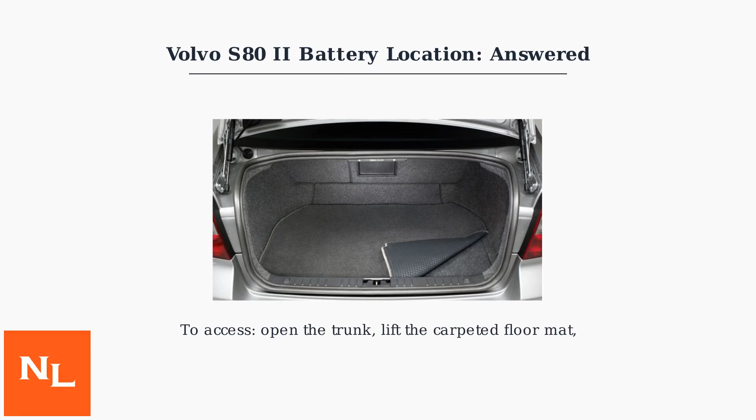The main 12-volt battery in the Volvo S80 II from 2006 to 2016 is located in the trunk, not under the hood. This design optimizes weight distribution. To access it, open the trunk, lift the carpeted floor mat, and remove any plastic covers. The battery sits on the right side in a plastic tray, secured by a clamp and cables. This is where you'll find the battery for jump starting or replacement.

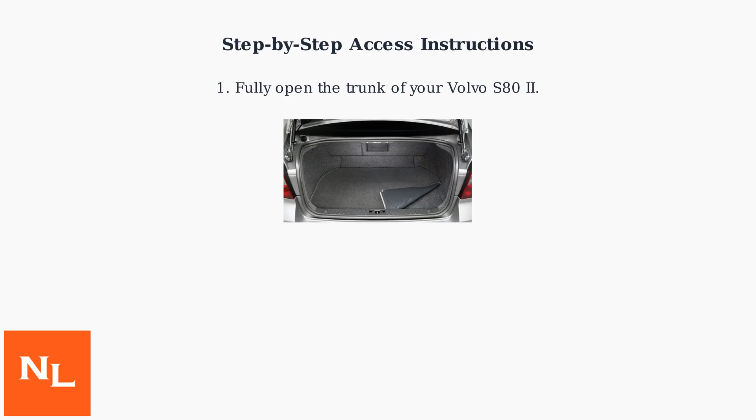First, fully open the trunk of your Volvo S80 II. Next, lift the carpeted floor mat, which is usually held down by clips or fasteners. Beneath the mat, you'll likely find plastic covers or foam padding. Remove these to expose the battery. Be careful not to damage any components during this process. Now you have access to the battery itself.

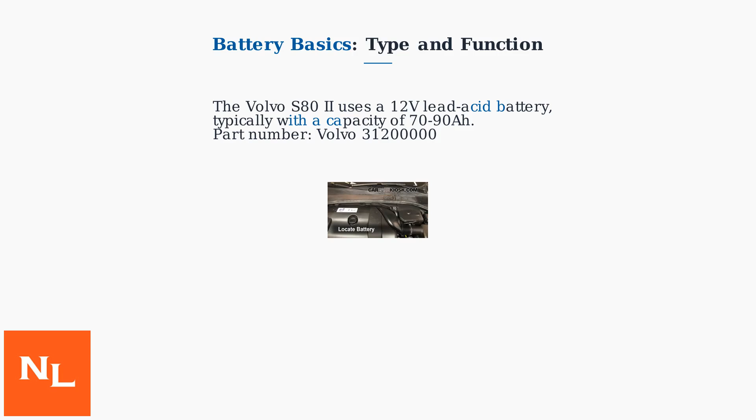The Volvo S80 II uses a 12-volt lead-acid battery, typically with a capacity of 70 to 90 amp-hours. Part numbers include Volvo 31200000. It's responsible for starting the engine, powering lights, and stabilizing the vehicle's electrical system. While standard lead-acid batteries were originally used, many owners upgrade to AGM batteries for improved cold weather performance and durability.

When working with the battery in your Volvo S80 II, you'll need specific tools to ensure safe and effective maintenance. Essential tools include a wrench for loosening and tightening the battery terminals. Protective gloves are crucial to shield your hands from potential acid exposure. A battery tester helps verify the battery's condition and voltage levels.

Moving to safety precautions, always ensure the vehicle is completely turned off before beginning any work. Disconnect the negative terminal first to prevent dangerous electrical sparks. Wear appropriate safety gear at all times, as batteries contain sulfuric acid and can explode if short-circuited.

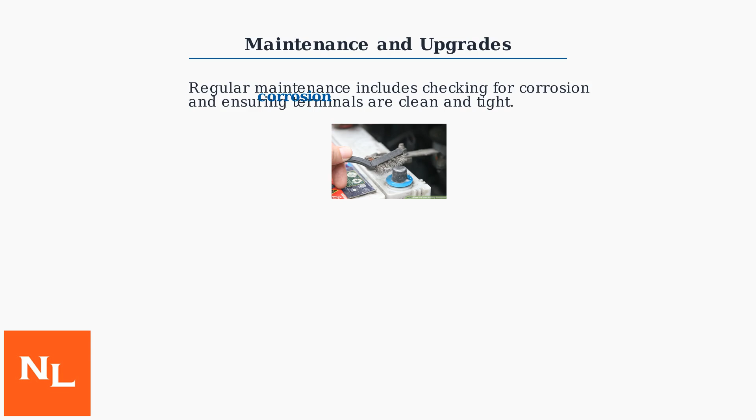Regular maintenance for your Volvo S80 II battery includes checking for corrosion and ensuring the terminals are clean and tight. This helps prevent electrical issues and extends battery life. Consider upgrading to an AGM battery for improved performance, particularly in cold climates where traditional batteries struggle. AGM batteries offer better resistance to temperature extremes and vibration.

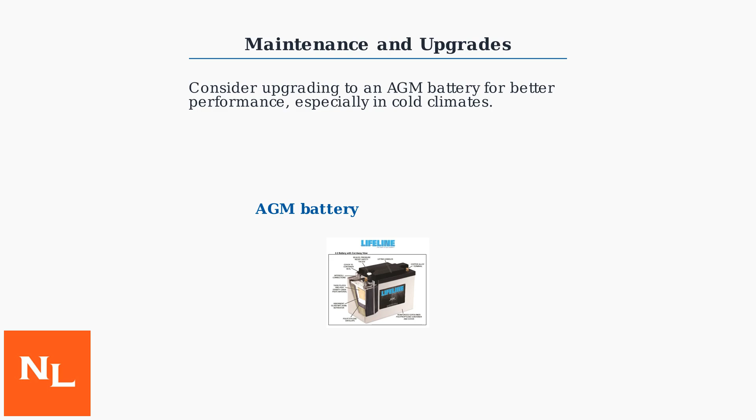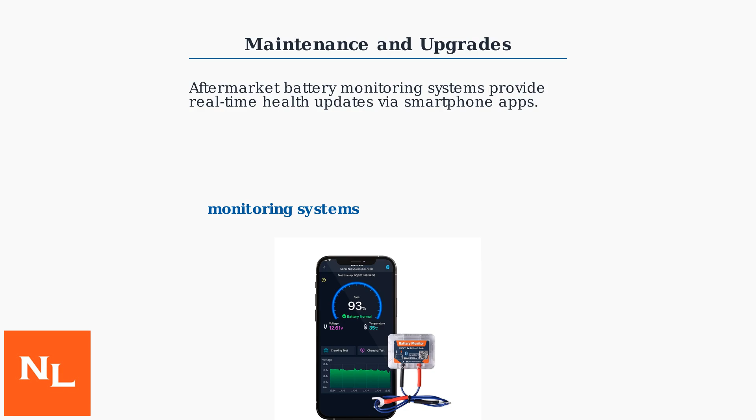Aftermarket battery monitoring systems can provide real-time health updates through smartphone apps, offering more detailed information than the vehicle's original basic sensor. Common battery issues in the Volvo S80 II include corrosion, especially in humid climates, and battery drain caused by faulty alternators or other electrical problems.

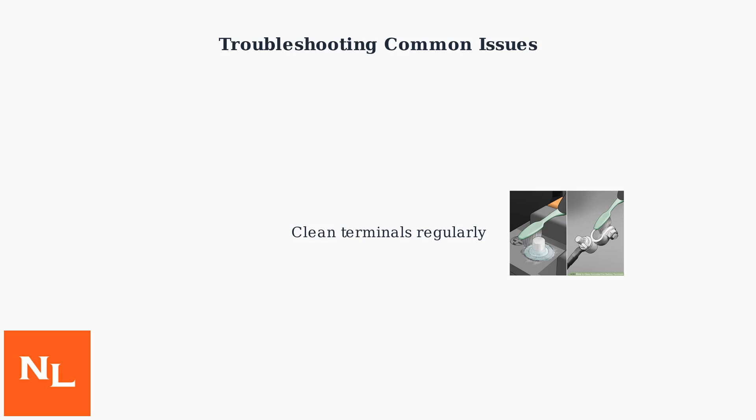If you experience repeated battery failures, clean the terminals regularly and check the alternator's output for proper voltage. OBD2 scanners can help diagnose battery-related issues by monitoring electrical systems.

The automotive industry is rapidly moving towards electrification, with traditional 12-volt batteries being phased out for advanced technologies like lithium-ion batteries and sophisticated battery management systems. Lithium-ion batteries offer higher energy density and faster charging, making them ideal for modern vehicles. Advanced battery management systems monitor health and optimize performance in real time.

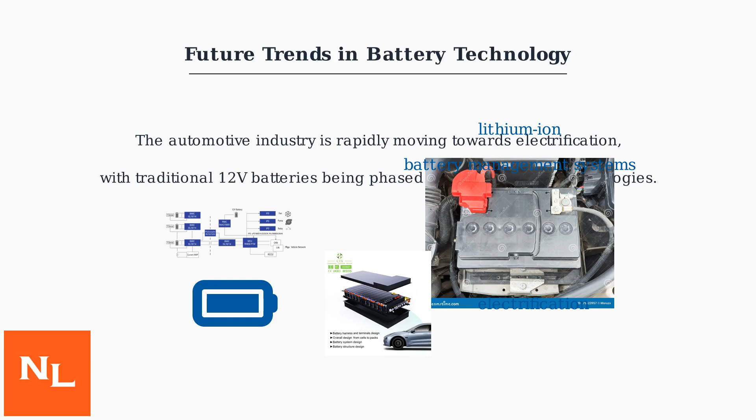For older vehicles like the Volvo S80, aftermarket upgrades including lithium-ion retrofits are becoming available, offering improved efficiency and longevity. Expert recommendations from Volvo-certified mechanics emphasize using AGM batteries for their superior longevity and resistance to vibration. When considering retrofits, always opt for professional installation to prevent compatibility problems with the vehicle's electrical system. Finally, embrace sustainable practices by properly recycling old batteries, supporting the global push toward eco-friendly battery management.